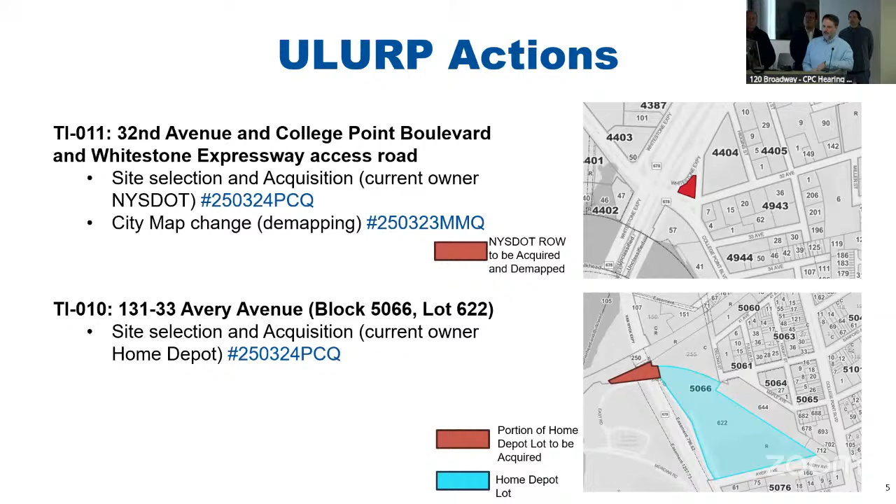So this, just to give you the context, this is the TI-11 site. That's the state-owned traffic triangle. The bottom picture shows behind the fence, below the Whitestone Expressway. And we have a picture of the rendering next.

I believe the question was asked at certification about PDC. This will be approved by PDC. We're currently in that process, so it has not been approved yet, but we are getting PDC approval.

And this is the TI-10 site. That grassy area on the left side of the picture on the bottom would be where we construct our facility. That's what's East Road that goes into Flushing Meadows Corona Park. And then the rendering here shows it there, under the Van Wyck Expressway.

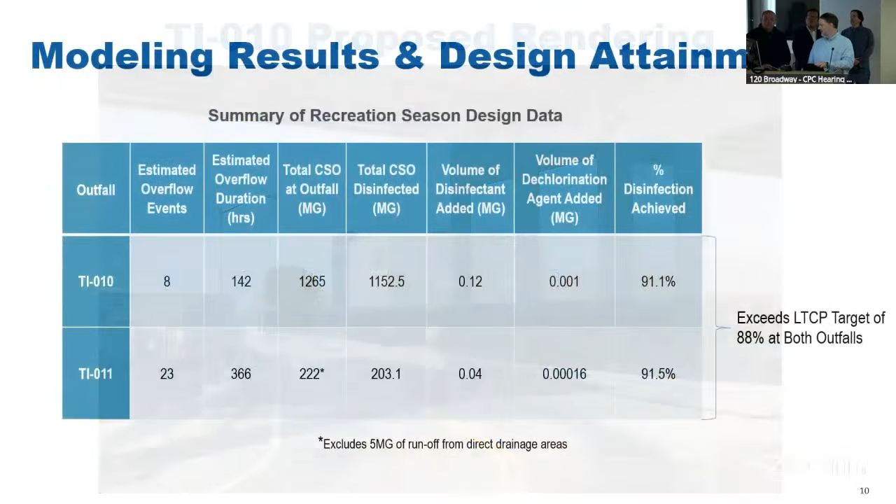All right, I'm going to pass it to Tim. Okay, thank you. Timothy McDonald from Arcadis of New York, the DEP's design consultant.

So for the design implementation, we start by doing sewer modeling. Basically the city works to model the entire sewer drainage area, about 9,000 acres for these 2 outfalls. During the months of May to October each year is when the disinfection is required to occur.

So a summary here on the table is the number of events that occur in CSO flows going to the creek. Throughout those events, it's an average of 16 to 18 hours per storm event where disinfection would be required. There's just over about 1.4 billion gallons of flow that goes out to the creek currently untreated. The intent is to treat approximately 91% of all the flows that go out to the creek.

We do that by adding a chemical called sodium hypochlorite, about a 5% solution, essentially commercial bleach. That reacts with the pathogens and bacteria in the water. If there's any remaining residual chlorine, we then treat that water again before it goes to the outfall with sodium bisulfite, a reducing agent that works to deactivate any remaining residual chlorine in the water.

In comparison to the over 1 billion gallons of flow that goes out to the CSO, the total volume over that entire period of disinfectant that might be added is on the order of about 120,000 gallons, and the sodium bisulfite is about 1,000 gallons, throughout the course of those storms over that 6-month period.

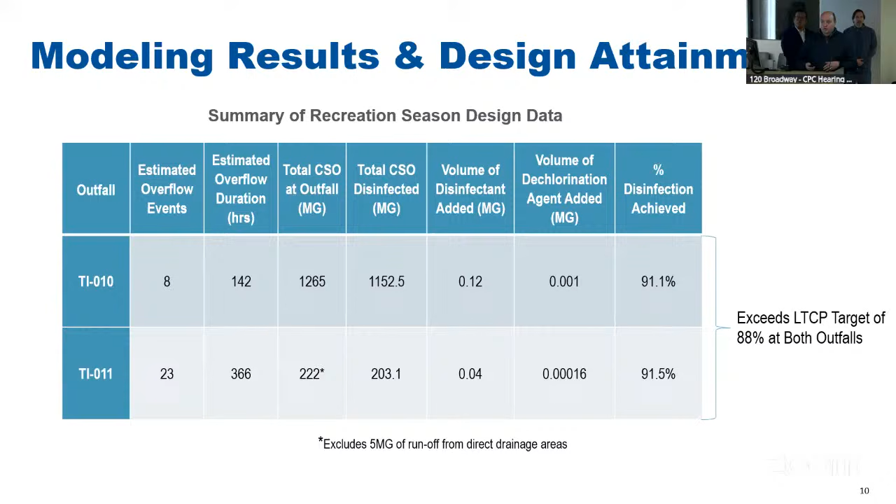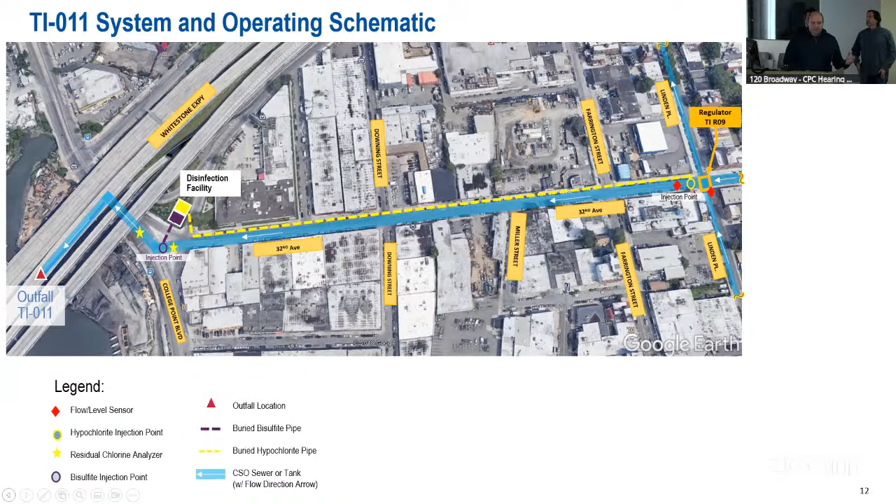So the technology we're implementing here is exactly the same as what the DEP uses in all their facilities. The primary difference is that in this case, we're adding the chemical to a pipe instead of a tank at a treatment plant. So there's a time difference in the amount of time the water can be exposed to the chemical. Okay, so there's a system in place to deal with it, it's dealt with, but I guess I'm really asking a bigger picture question about, of all the CSO that exists in the city, what percentage of it has this treatment of chlorination and dechlorination—that's really what I'm asking.

This would be the only one, and this is going to be the first. I'm sorry, say that again? This is the first, and this would be the only one where it's treated into a pipe. There are others where it's treated in other ways, in a tank.

If you take the tank and the pipe and look at the overall CSO of the city, what percentage is treated using chlorination and dechlorination as opposed to no treatment? Do you know that number? I think we'd have to get back to you. I realize it's not about this specific application, but I'm interested in understanding how it all fits together. It'd be safe to say it's relatively small, considering the number of outfalls the city has. As a percentage of flow, if there's any way, I would be interested, but obviously it doesn't have specific bearing on this application.

Okay, I'm going to go to Commissioner Rampersad, Commissioner Dweck. Sure, how you doing? Thanks for the presentation. Just a couple of quick questions. Can you walk us through the presentation to the community board and their feedback? And have you gotten the chance to take a look at the borough president's recommendation of disapproval? Can you speak to the two conditions that he mentions?

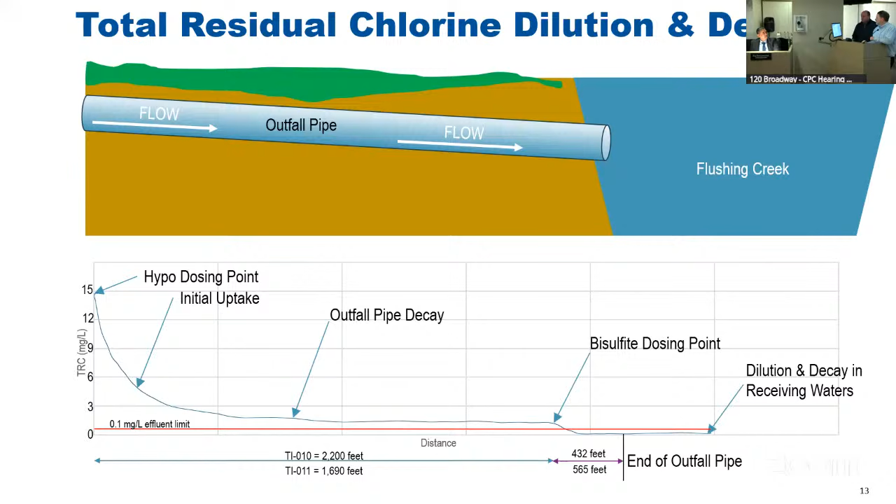This shows you all the assets we built in the drainage area. I think it's 2,000. I think something over - I remember the investment was over... what's that? $140 million in GI in this drainage area. Thank you. Thanks, Commissioner.

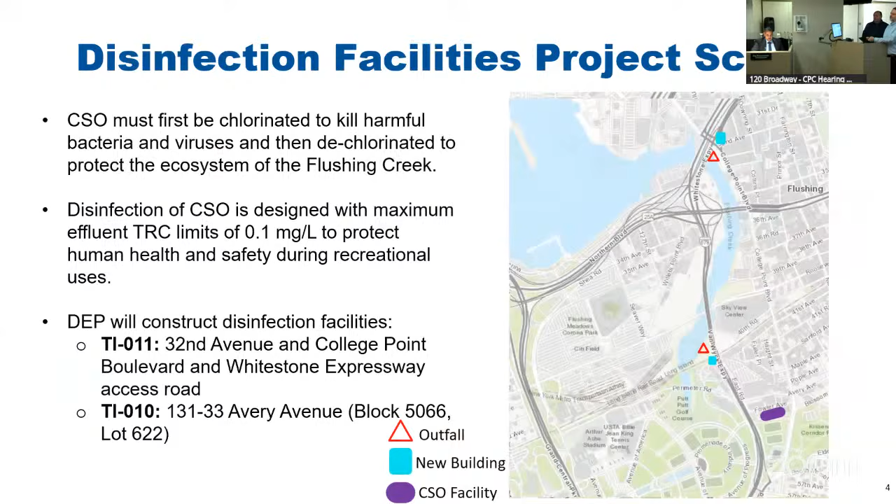Commissioner Dweck? Thank you, so one of my questions was answered. You noted at the beginning that there are 60 similar systems throughout the United States that have been installed already. Is there any real life feedback from how they are operating? Do you know? Did you see that? Yeah, when we first proposed these projects, we actually met with Michigan - I think they have like 15 facilities. We went out there and met with the operators.

This is just in Michigan itself. They do disinfection at almost every outfall. We met with them, and they said there's a learning curve, but it's working. They've been doing it for about 20 years now. We looked at their results, but they had much more lenient limits than us, typically 2 milligrams per liter where we have 0.1. Sometimes they would just chlorinate and weren't too concerned about the chlorine in the receiving water. This was back in 2015, when we met with them.

Some of the municipalities in Michigan that have experience with this have written white papers on their experience with the control technologies we're implementing here. So there are a lot of lessons learned from their experience that we're applying to make sure the systems we implement will actually work in this type of setup.

Thank you. Thanks, Commissioner. Commissioner Benjamin? I have a couple of questions. One is, if I'm understanding you about the chlorine...

My questions are specifically focused on Policy 6, in terms of the potential impact on natural resources. I read your analysis in the WRP, but I'm wondering why there are some things that we just didn't monitor because they were not required by the EAS. On Policy 7, chemical exposure: I read your provisions to protect the facility or sites from future flooding, and it's clear you're fulfilling the requirements of Appendix G in terms of elevating the entrances and elevating electrical equipment, but not the chemical storage tanks. So I want to understand the plan there, because going back to Commissioner Benjamin's question, it sounds to me that in addition to WRP requirements, your own community right-to-know laws may trigger, depending on the amount of chemicals you're storing, an actual emergency protocol here. So I'd like to understand more about the plan.

And then finally, on Policy 8, waterfront access: I was wondering if you can explain how the actual facility is going to relate to Corona Park, and what are the impacts from an urban design point of view on waterfront access?

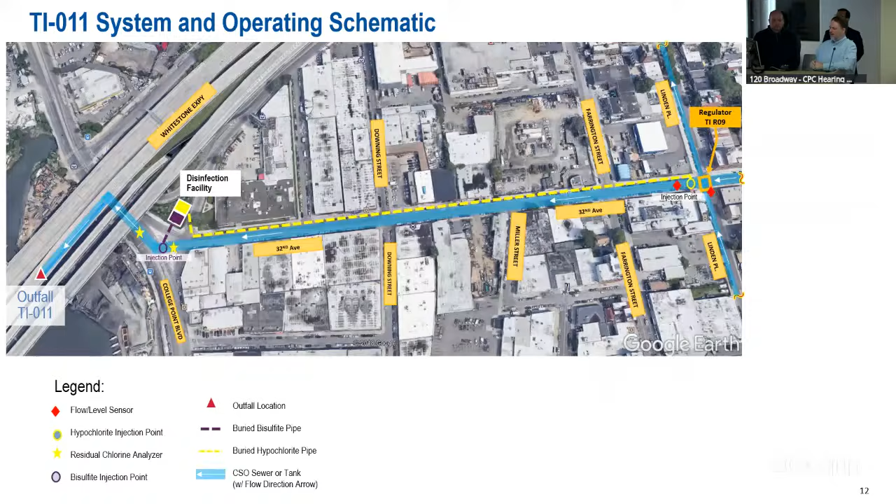And then, you know, obviously we have the existing CSO retention facility that's in the park, part of the Al Oerter Recreation Center, so we've been working with the Parks Department to make sure all the work we have to do there is coordinated, because that's their maintenance yard. But we don't expect any disturbances to the park's operation at that facility.

If you could maybe share with us a little more detail in terms of what the actual pedestrian experience will look like once this is built, that will help me understand and illustrate your response. But I appreciate that response.

So where this is situated, you can see in the aerial view in the upper left, and even the picture in the upper right. It's more in a maintenance area for the park, so there are no sidewalks in that particular area. The intent, in discussions with the Parks Department, is that if you look at the photo in the upper left, that long rectangular building—just below it there's a pedestrian walkway that goes underneath the Van Wyck Expressway and lines up with Avery Avenue and the crosswalks that connect to the sidewalks contiguous with the Flushing area. So they prefer to deter pedestrians from going up this walkway and roadway, because it's a very tight, busy area. There's a lot of truck traffic in and out of the park at those locations, as well as to the Parks Department's maintenance facilities—blacksmith shops and mechanics—all housed in that long rectangular building adjacent to where we're proposing to site this facility.

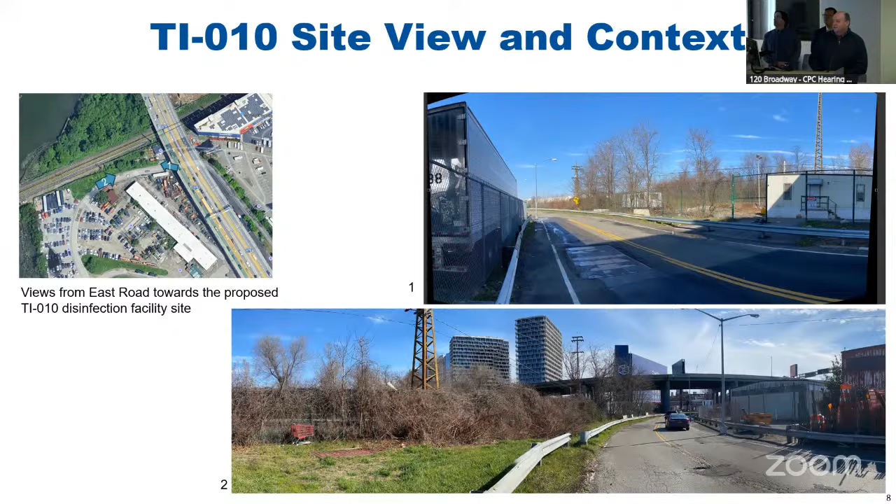Sure. So as you noted, the facilities—here I'll pull up the rendering, this is the TI-11 facility. For both facilities, where they're sited, I believe the base flood elevation is between 5 and 6 feet above finish grade. That's where this could potentially flood to when looking at future floodplain projections. As you noted, the entrances to the building and all the openings were elevated above that, anywhere between 8 and 9 feet above grade—so three or more feet above the projected flood elevation. The tankage inside is up to 9 feet, basically up to that flood elevation.

The exterior of the buildings is concrete walls connected to a concrete foundation, and the entire facility is pile-supported as well, so water can't get in anywhere at those lower elevations. Any penetrations we have, say for piping or electrical conduit, are mostly above those elevations, but anything we can't put above is all watertight connections.

But what happens if water actually gets in? There were examples here after Sandy where water went in. Are there secondary valves? Are there berms? How are you potentially containing that? We're designing the building to be resilient against that type of scenario.

Yeah, so fair enough, it's year 2100 plus floodproofing protection, so it's base flood elevation plus 60 inches. So thank you, that's useful and fair enough.

I don't want to take more time, but I was wondering if there may be additional level of detail required by your community right-to-know laws down the road for operations purposes, and anything you can anticipate for us to understand how you're planning to respond to that potential scenario, to give the public some assurance, would be appreciated. Sure, thank you. Thanks, Commissioner.

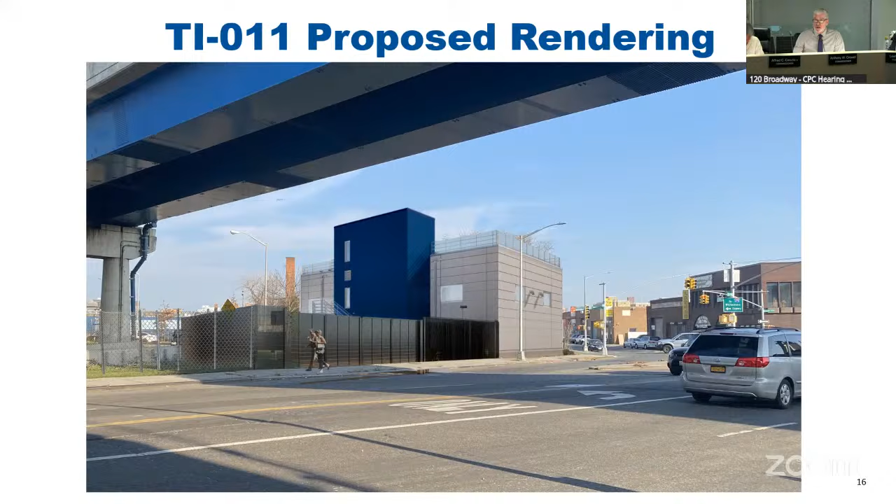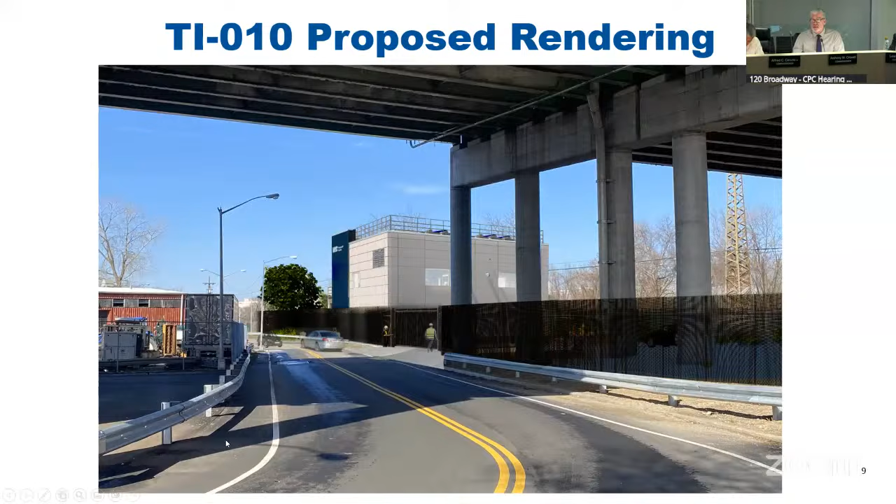Is there any effort, while projects like this proceed, and they're important given what the environmental issues are in relation to CSOs, that the city is looking at with respect to a longer-term plan to go to separate storm and sanitary sewer systems where CSOs become less necessary? I mean, I know it could take forever. There's probably no end date where that could happen.

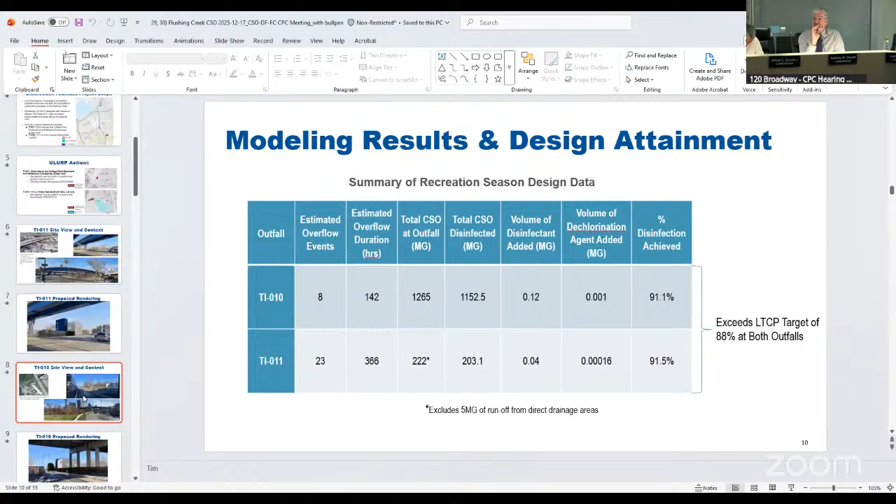I actually remember at one point back in the late 80s there was a price tag of like $10 billion then. But I just wonder, while these projects move forward, what is the long-term plan? Is it just to keep them and make them as sustainable and safe as possible? Or is there a plan over time to target neighborhoods where we can actually eliminate them and bring separate storm and sanitary systems into our communities? It's a big picture question, but it's so relevant at this moment.

No, like you said, the CSO programs go on forever. Right now about 60% of the sewers are combined, 40% are separated, some of that's even direct drainage. We do pursue that all the time. It's just, like you said, very expensive. Even that $10 billion from the 80s is like over $100 billion now, not even constructible.

Absolutely, but we're still looking for areas. We recently certified Rockaway's completely separated. There's a big project in Southeast Queens, but a lot of, in Staten Island, Oakwood Beach is separated, pockets in Port Richmond. A lot of times in congested areas with the utility sides of sewers, it's hard to do. So we're still pursuing pockets.

Like we're looking at maybe having some separation now, we'd send storm water into maybe Willow Lake and Meadow Lake upstream of Flushing Creek. But again, that's just a piece of it, it's hard to get all out of there. And even with stormwater, there's similar pollutant concerns with petroleum, and it's also regulated on an MS4 consent order. So yep, there's a lot going on.

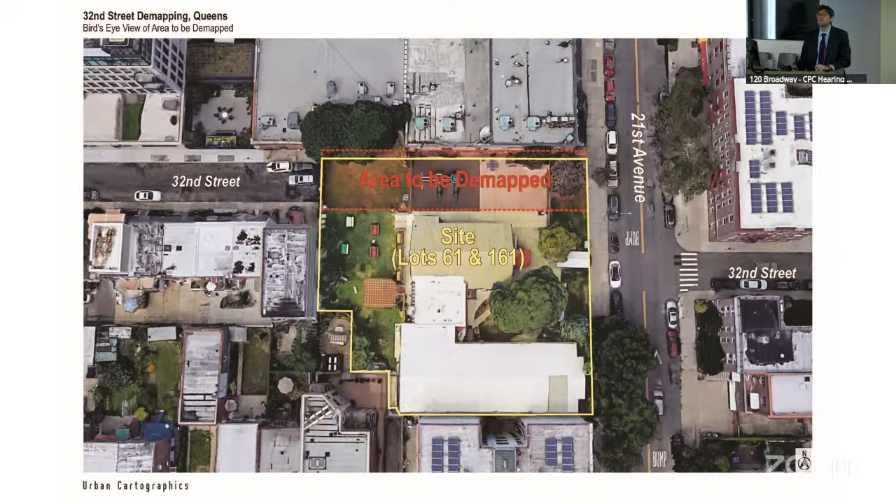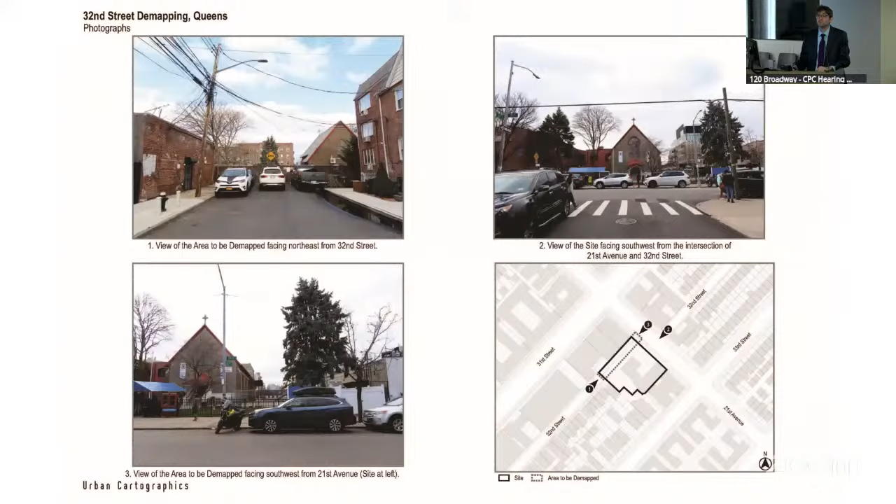As part of this process, we have worked with the topographical unit at the Queensborough President's Office. We've worked with the Community Board and obtained their unanimous support. We've been engaged with the Queens Office of City Planning, who's been very helpful in this process. I've finally gotten to the point where it appears that we have, at least on the agency side and on the elected side, no open hostility to this removal of this paper street.

So we're excited to have it at this stage of ULURP and hope that the Commission agrees that this is a minor cleanup of a city map in order to ensure the continued operation of a valued nonprofit local community organization. There's much more I could say on this application, but with it being a single person presentation, I tried to limit my words and be available for questions. So thank you, and if you have any questions, let me know.

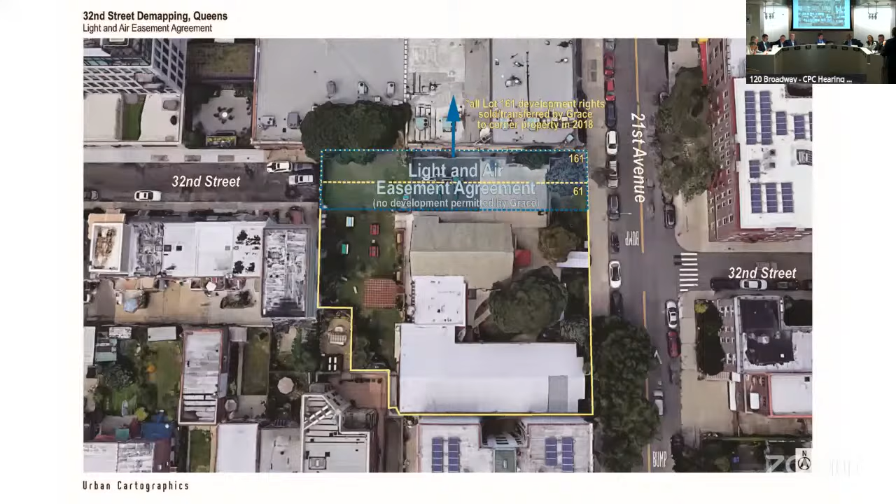Great, thank you very much for that. Let me see if there are questions for you. Okay, looks like there are no questions for you, so thank you for the thorough 3-minute presentation. Thank you all very much.

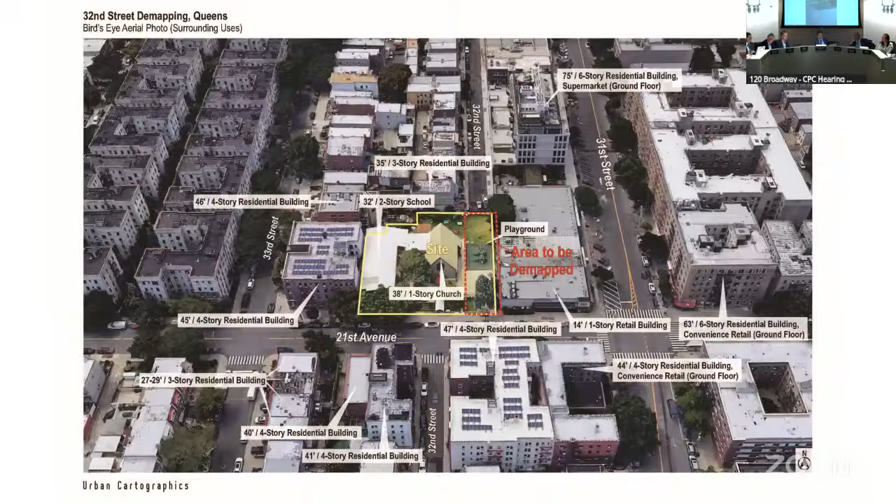Okay, I see no members of the public wishing to be heard on calendar number 31, the 32nd Street demapping, so we'll close the hearing on this one too. Madam Secretary, over to you. Do we have other business before us today?